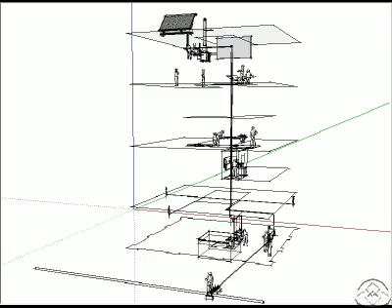The potable water system is designed to safely deliver filtered hot and cold water to plumbing fixtures throughout the building. The water enters the building from a tap at the water main for the municipal water system.

To make this tap, a drill and valve are mounted to a sleeve that clamps around the main without shutting it off. Once the drill cuts into the main, a water meter and a building cutoff valve are added to the service line along with a backflow preventer.

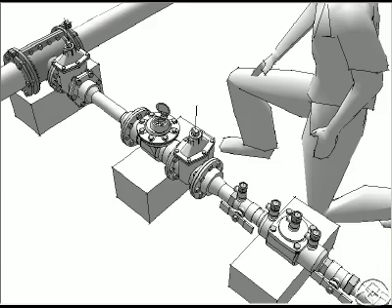The service line has a gooseneck to allow for expansion and movement. The line enters the building through a sleeve in the foundation wall. Water flow into the building is controlled by a building shutoff valve. It then enters a whole building water filter system.

Taps for the yard hydrant and makeup water to the non-potable tanks bypass these filters. The yard hydrants are outdoor connections for maintenance. The makeup water is part of a feed to the non-potable tanks. This feed is controlled by floats in the recycle tanks that sense when harvested water for the toilets is low and needs to be replenished.

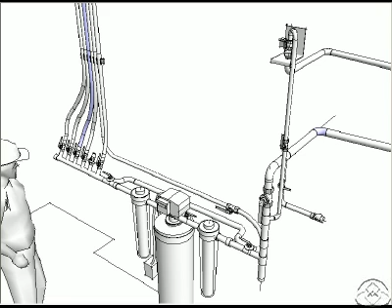The potable water flows through an air gap to prevent backflow and cross-contamination from the non-potable water system. Two removable canisters filter chemicals and solids. A treatment tank to condition the water supply is also shown. The design of the filter system depends on the quality of the water source and occupant needs in the building.

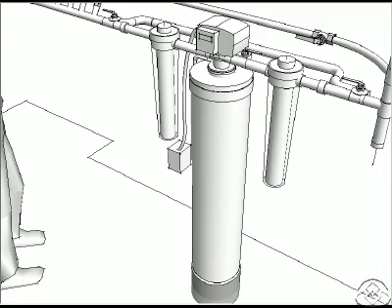Individual tubes are tied to a PEX manifold to feed each floor and the hot water system. The longest of these tubes runs to the rooftop heat exchanger. This heat exchanger preconditions cold water with heat from a solar collector for use in the building. Water from the solar system flows to a heat pump that extracts heat from rising air in the light shaft and transfers it to the water.

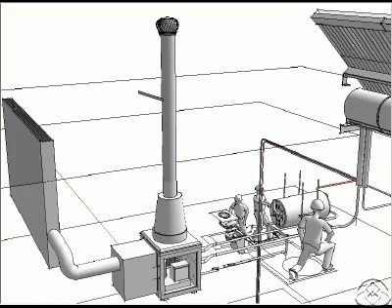Hot water then runs to a horizontal water heater that stores and maintains water temperature and makes it available for the third and fourth floors. The first floor uses an on-demand recirculating pump for the shower room, while the basement uses independent inline water heaters.

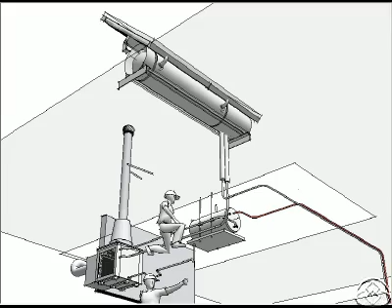The basement sinks and drinking fountain receive their cold water supply from a flexible tube running from the distribution manifold. Hot water to these fixtures comes from an inline water heater under the sink and in the ceiling of the janitor's closet. These heaters are capable of providing a continuous flow of hot water on demand with no heat or water loss from the upper floor heating system.

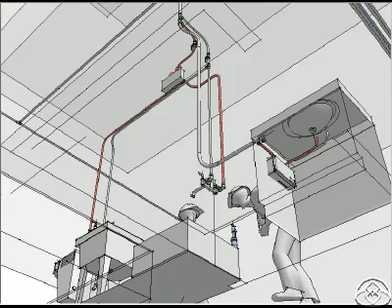Tubing supplying cold water to the first floor shower room connects directly to the lavatory sink and shower. Hot water is supplied within a few minutes when a timed demand switch near the sink and shower is pressed to circulate the water in the hot water lines. The pump eliminates line loss and minimizes waste from the tanks above.

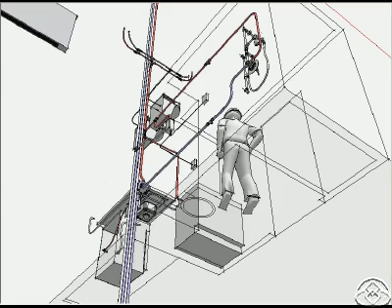On the second floor, tubing from the potable water manifold connects to the drinking fountains and the lavatory sinks. Hot water is supplied from a riser extending directly from the hot water tank above. Since these fixtures are close to the hot water source, no supplemental heat is shown, though it could be added if the situation demanded.

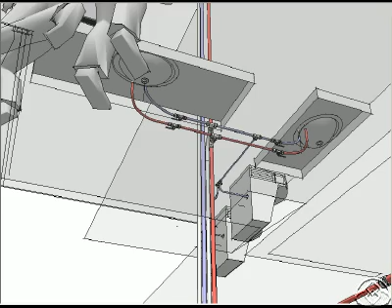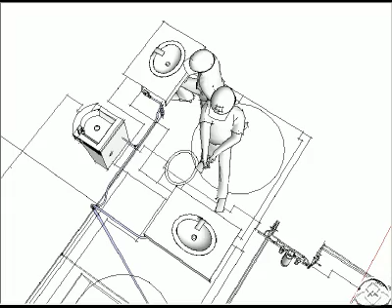Finally, on the third floor, cold water supplies are similar to the second floor. The small diameter flexible tubing that extends from the basement again provides a simple and efficient way to deliver water to the fixtures. Note that the shutoff valves for both the hot and cold water supplies are provided under the sinks for every floor.